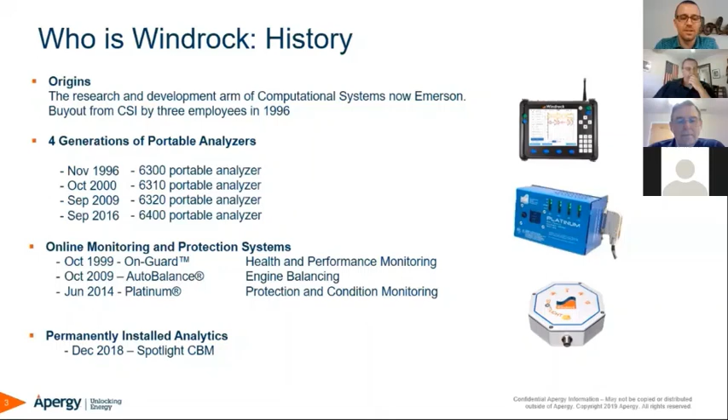And then our newest product is Spotlight. We've got Spotlight for both compressors and high-speed engines. We'll deep dive into each of these momentarily.

Starting with Platinum - it's really our Cadillac system. It's collecting data almost every second. It's got real-time data being displayed, and it also works with the AutoBalance for those integral engines.

Moving down, we've got Spotlight. It's an IIoT-enabled system - really kind of a plug and play, easy to install system. We can go out on a compressor, on a 4-throw compressor, and have it up and running in a few hours. It's a low cost system, and you can see all your data remotely. We have a dashboard called Windrock Enterprise, where you can see not only your entire fleet, but drill down into just one single machine. And then we have our 6400 portable analyzer, which you can use to go out and collect data on multiple machines.

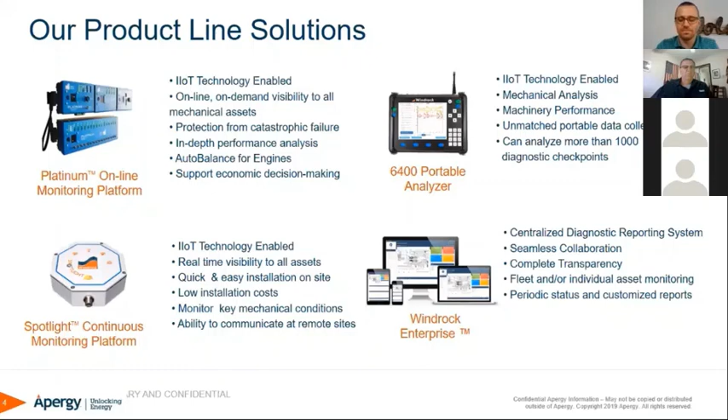Our products are used across various assets. For the critical assets - those machines that really require real-time monitoring and protection, where you want to shut down at the sign of a catastrophic failure, or before one - we recommend Platinum. That's probably about 20% of the assets out there. And then for the essential assets, where you want to monitor the system but aren't interested in the protection aspect, that's where Spotlight comes into play. We can monitor an entire fleet and let you know when a problem may be occurring.

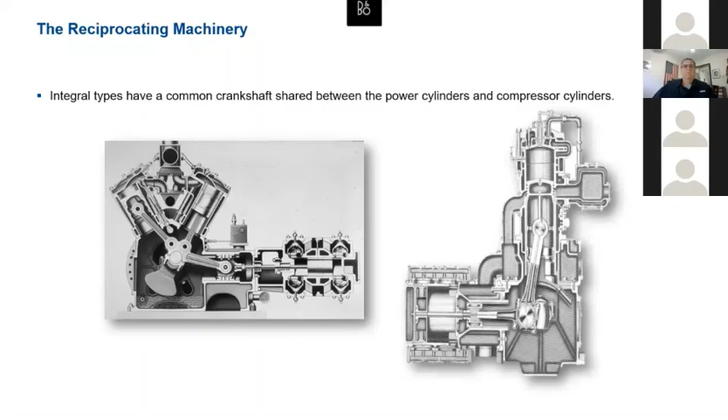PV diagrams - it doesn't make any difference what kind of compressor you've got, whether it's an old slow speed integral or a separable high speed. The PV diagram is the same for everything.

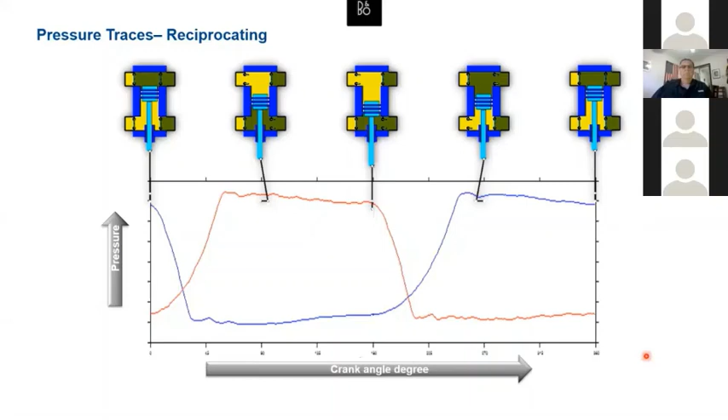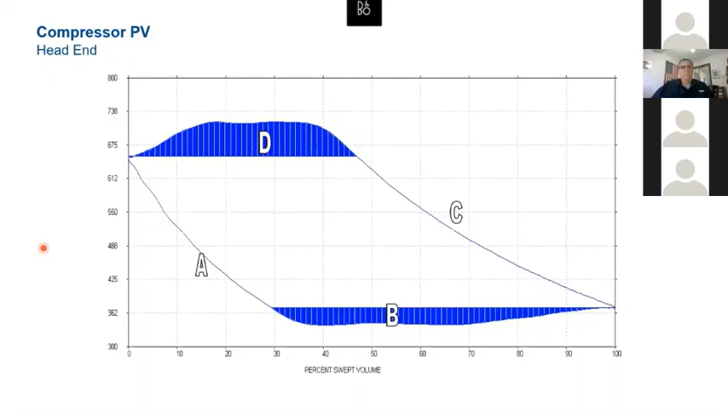Now one of the main calculations we get out of that is the horsepower - your indicated horsepower. All this area inside the PV diagram represents work, including these shaded areas. These shaded areas are actually power losses, but they're included in the horsepower. So all that area in there is work.

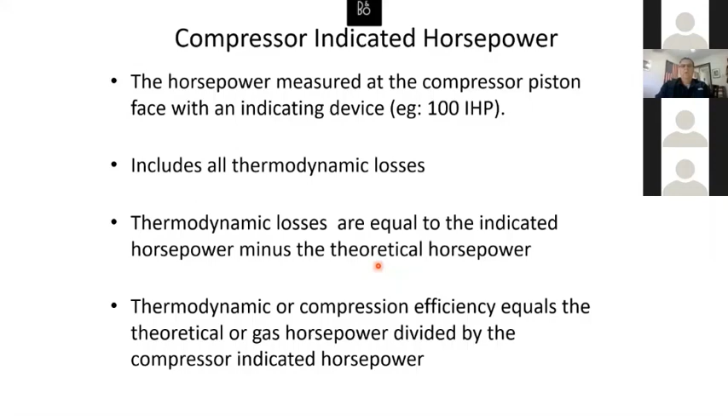And that doesn't mean that poor horse has to pull 33,000 pounds in 1 minute. He could pull 33 pounds 1,000 feet in 1 minute. You know, it all works out the same.

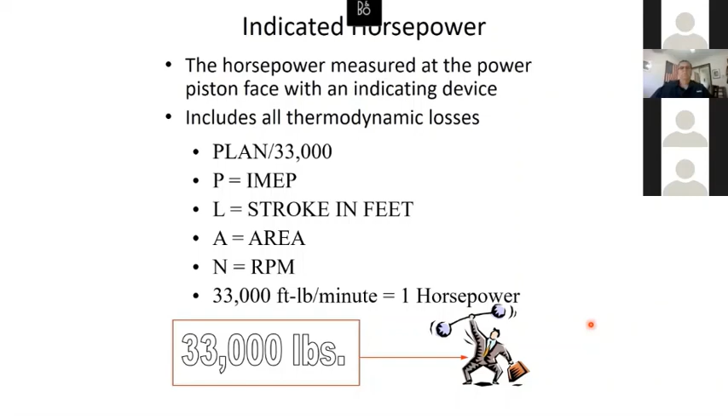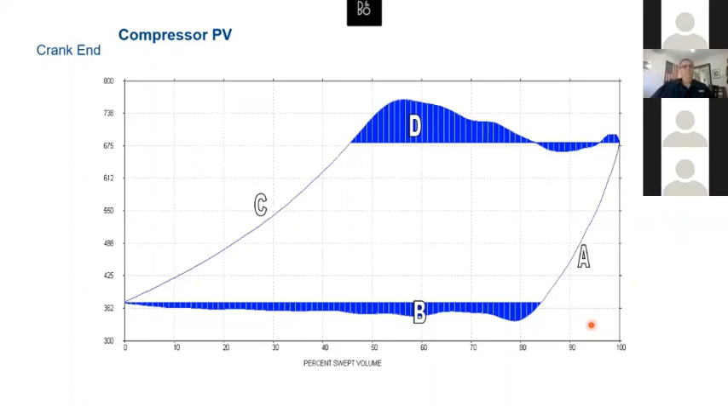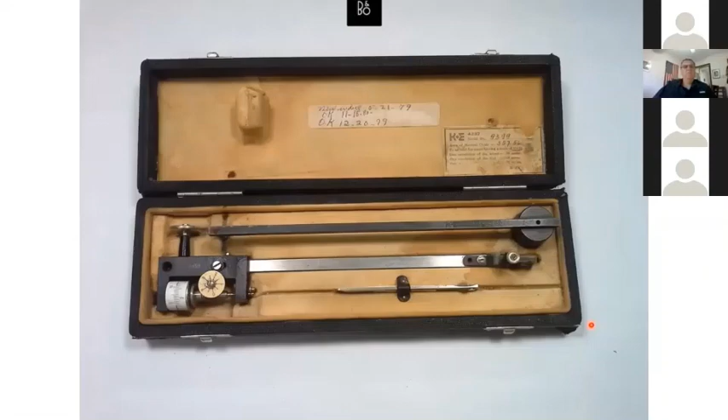In the old days, we'd take that PV curve, which we got by various means, sometimes an old XY plotter hooked up to an analyzer, and we used the polar planimeter. With the planimeter, we actually measured the inside area of the PV curve in square inches and converted that into indicated mean effective pressure. We'd anchor the thing, set the beam for the scale, anchor it down, and trace the PV curve to calculate the indicated mean effective pressure.

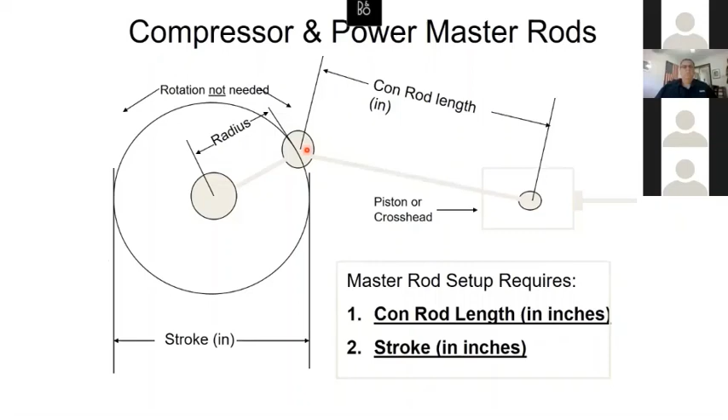Now the way we're doing it nowadays, we have to have certain information to put in there. We need the connecting rod length and the radius of the stroke in order to calculate what the piston position is going to be at every degree of crankshaft rotation.

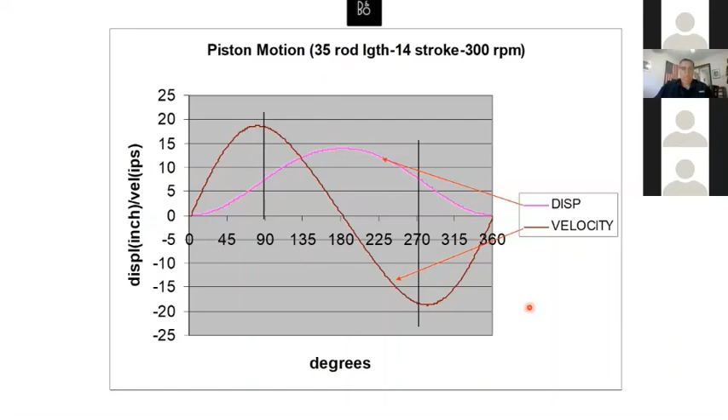This is the speed of the piston. It's not the same for every degree of crankshaft rotation - it's speeding up, slowing down, speeding up, slowing down. At bottom dead center and top dead center, we can see places where it flattens out, where it's not moving much per degree of crankshaft rotation. So the analyzer has to know that so it can calculate how far that piston moved at every degree of crankshaft rotation.

Because what we're actually doing is measuring force, which is pressure times area. The analyzer can do that for us - we know the area of the piston face and the pressure at every degree of crankshaft rotation. But to calculate our horsepower, we have to calculate work, which is force times distance for the stroke, but at every degree of crankshaft rotation.

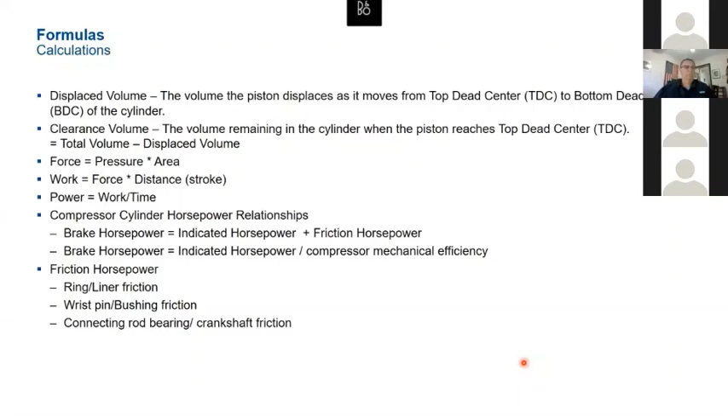So we have to know the distance the piston moved every degree so we can calculate the horsepower. Power is work divided by time, which is the 33,000 foot-pounds of torque per minute. Once we get all that done, it's pretty easy to calculate horsepower. It's just very dependent on your TDC setting - if your TDC is off, you're not going to be able to calculate horsepower correctly.

Now let's talk about the suction volumetric efficiency. The suction volumetric efficiency is the percent of the cylinder's displacement that the piston passes through if you draw an imaginary line from the toe pressure to the expansion line. Discharge volumetric efficiency is the percent of the cylinder's displacement that the piston passes from the discharge toe imaginary line to where it meets the compression line.

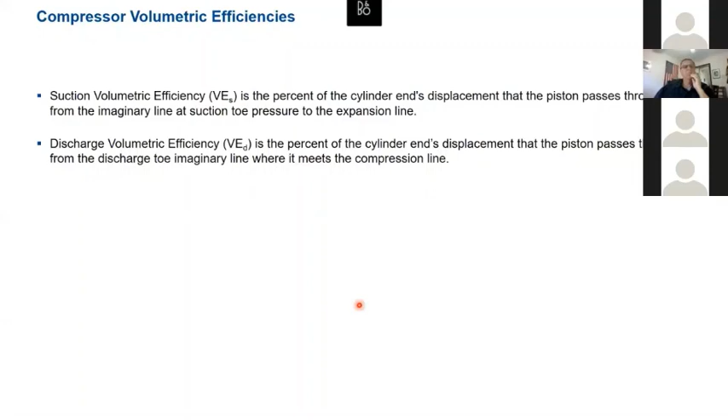So what we do here is go from toe pressure, you see on the discharge, draw that imaginary line right here till we meet the compression, then draw it straight down, and then we can calculate the volumetric efficiency.

This is the actual percentage of the swept volume that we use to move gas in this cylinder based on your clearances. Same thing on the suction here - we calculate the volumetric efficiency from the suction by going from the suction toe, drawing our imaginary line all the way till we reach the expansion line, and then measuring that down here on our percent of swept volume.

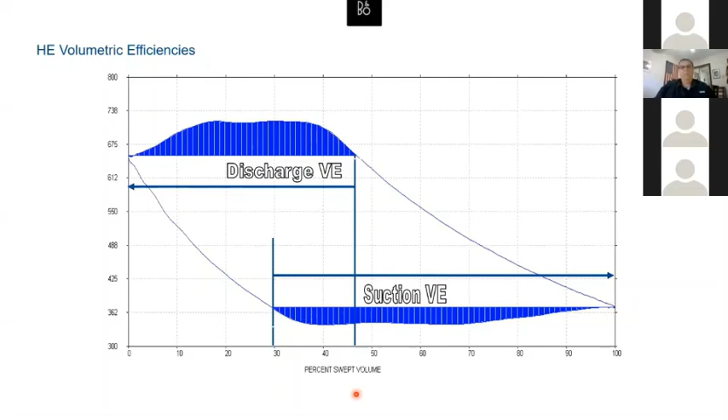We used to have to do that with a Polaroid photograph and a ruler to figure all this out, and the oscilloscope screen had graticules on it to help us calculate the volumetric efficiency. We're lucky now that we can do all that with the computer - we just poke the button and we get horsepower.

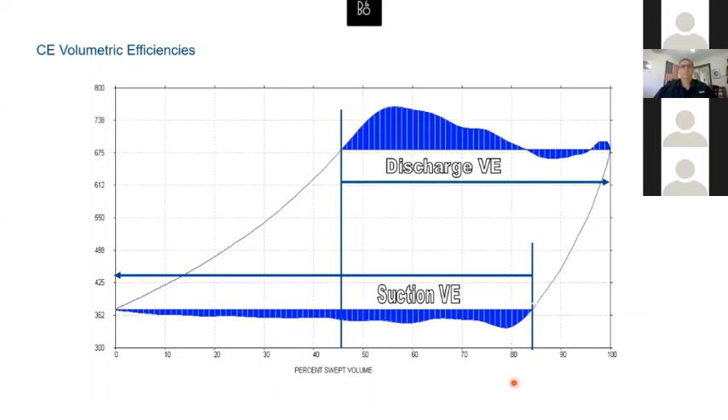Same thing when we're looking at the crank end here. We draw the imaginary line from the toe on the suction to the expansion line, measure the volumetric efficiency at that point, and then take the discharge volumetric efficiency from the toe to the compression line and do the same thing. We do that because we need the volumetric efficiency in order to calculate the throughput, or capacity of the compressor, based on the volumetric efficiency.

Actually, it's based on the displaced volume times the volumetric efficiency times RPM times 1440, which is the number of minutes in a day. Then we go through a pressure correction and a temperature correction divided by the compressibility factor. The pressure correction and temperature correction are in order to turn it into standard cubic feet a day - this corrects whatever readings you took back to sea level at 60 degrees Fahrenheit.

So that gives you the 14.696, or whatever that's your sea level pressure, and then it's 60 degrees, and it's going to correct everything back to that so we can have standard cubic feet. But from the PV, the main thing we get from that is the volumetric efficiency.

There again, your top dead center, and a lot of different things go into calculating your capacity. Other things you may have to look at are your temperatures, your gas sample, and several other factors that go in there. The linearity of your pressure transducer, several different things in there.

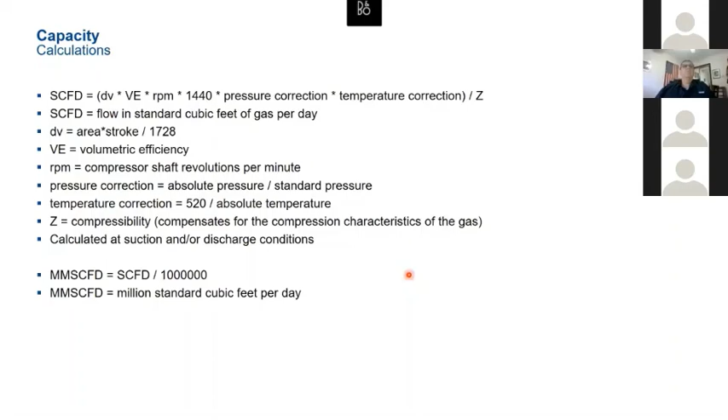So one thing to remember when we're using your calculated capacity is suction calculated capacity goes up with a suction valve or packing leak, or anytime you've got high pressure gas leaving the cylinder. The suction calculated capacity goes down with a discharge valve leak, or we have high pressure gas coming back into the cylinder. Discharge calculated capacity goes up with a discharge valve leak. Discharge calculated capacity goes down with a suction valve leak or a ring leak. Just the opposite.

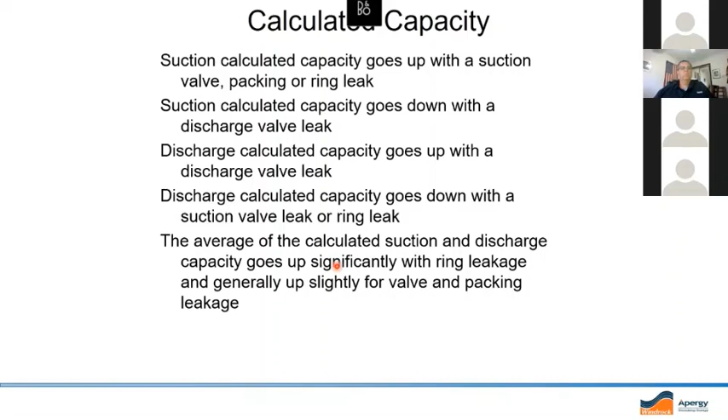Now what we're talking about here, the calculated capacities go up or down. The actual capacity is going to go down no matter what kind of leak you have. The average of the calculated suction discharge capacity goes up significantly with ring leakage, and generally up slightly for valve and packing leakage. But your actual always goes down on that.

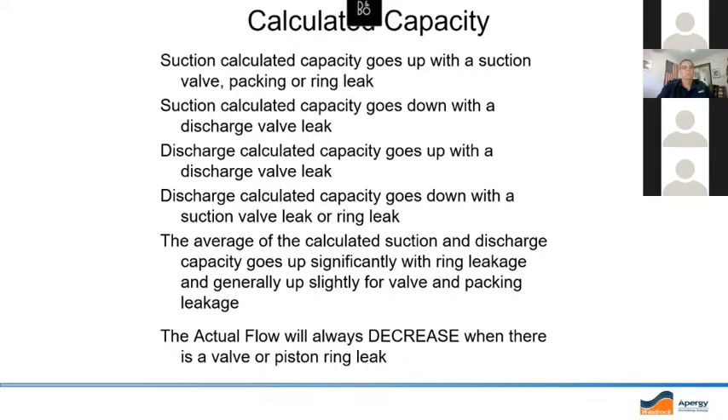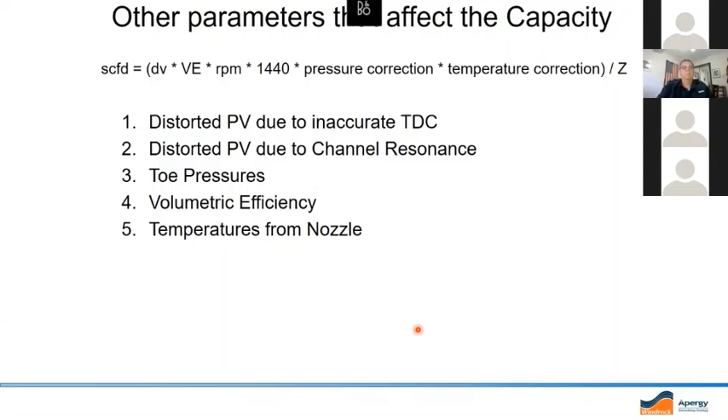Here's things that's going to affect your capacity calculations. Distorted PV due to an inaccurate top dead center, distorted PV due to channel resonance, toe pressures, volumetric efficiency, temperatures from the nozzle, gas properties, pressure zero offset, or pressure transducer linearity. These are just 8 of the things that may affect your capacity readings.

Now your flow balance is also calculated from those capacity readings that we use the PV for to obtain the volumetric efficiencies. So the flow balance is just telling you the difference between your calculated suction flow rate and your calculated discharge flow rate.

We get a result greater than 1, indicates that the gas is leaking out of the cylinder into a low pressure area. And a result less than 1 indicates gas leaking into the cylinder from a high pressure area. If you think about it, that's really the only leakages that you've got. You've got gas coming in, or you got gas going out. Those are the two leakage patterns that you can have.

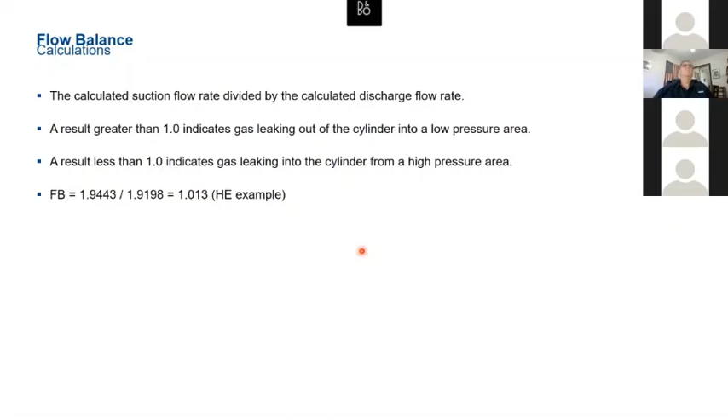Your accurate flow balance is dependent on the accuracy of the TDC reference. There we go again, that's probably the most important thing you want to make sure is correct on your PV card, the TDC reference. The toe pressures, suction and discharge temperatures at the valve ports, gas compressibility, and volumetric efficiency picks.

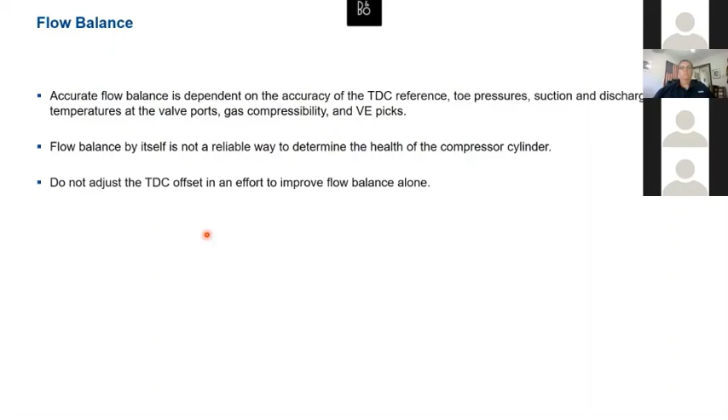And going in, I want to stress that flow balance itself is not a reliable way to determine the health of a compressor cylinder. And you never want to adjust the TDC based on that.

Another thing we're looking at when calculating capacity is the Z factor, the compressibility factor. It's the ratio of the molar volume of gas to the molar volume of ideal gas at the same temperature and pressure. It's a useful thermodynamic property and whatever.

Actually, what the Z factor is, is a fudge factor. It's saying that the gas sample you're compressing has these characteristics that don't really match up with the ideal gas law. So they're saying we're gonna modify that a little bit to make it where it does match up.

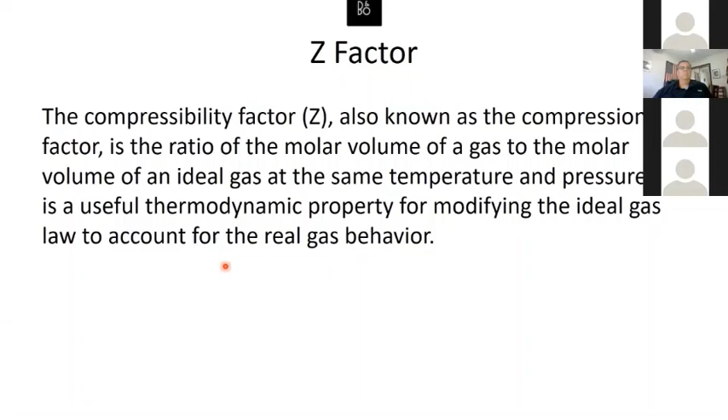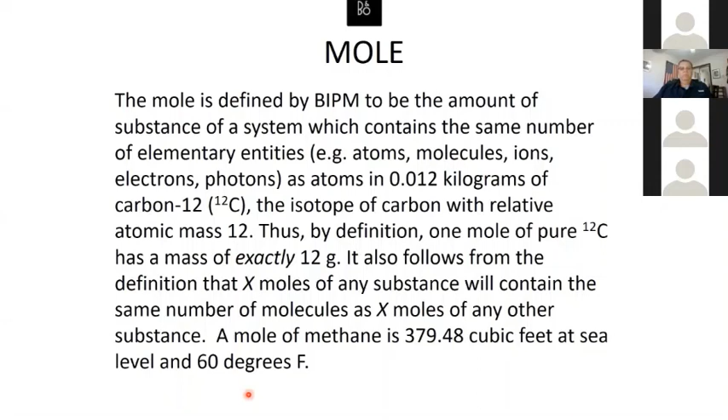And you're talking about molar volume of ideal gas, this is where this comes from. It's just the amount of any substance that has the same number of molecules as 12 grams of carbon 12. So going by that criteria, a mole of methane is 379.48 cubic feet at sea level and 60 degrees Fahrenheit. That'll kind of give you an idea when we're talking about moles, that's what it is.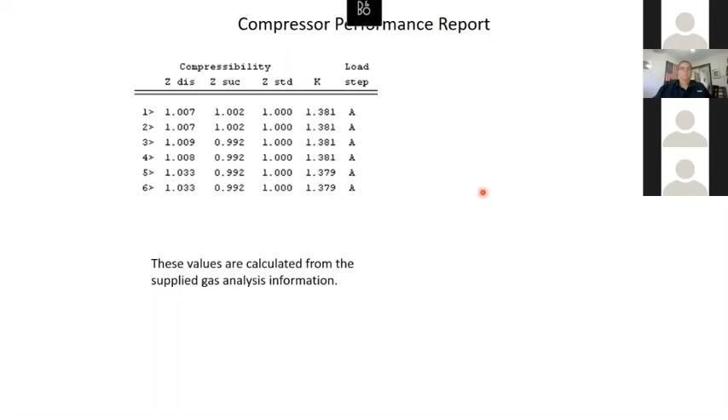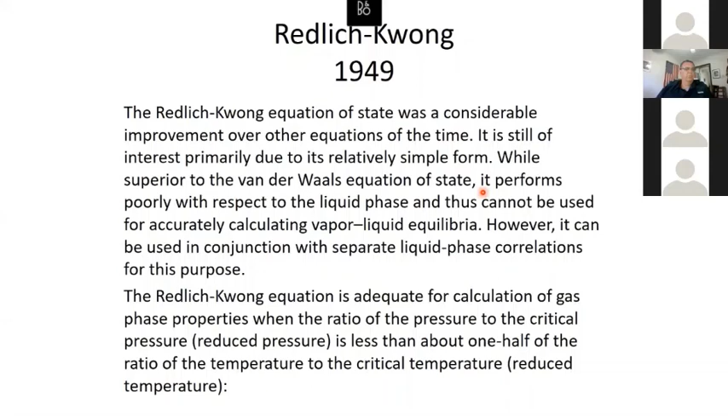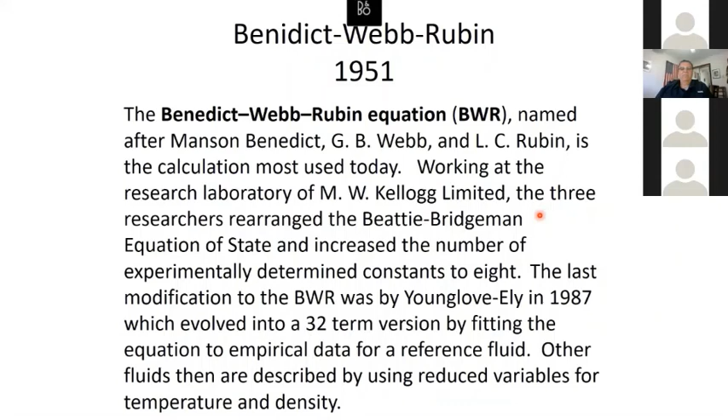We've got a couple of equations of state, which is what we call them, where we calculate the suction and discharge compressibilities, and these are just some of the different ways we do it. We use the Benedict-Webb-Rubin, I think 1987 was the last update on that, that's the one we use. If it won't match up, then it goes all the way back to the Redlich-Kwong, which is a very simple one. So we have three different ones. We'll also use the Beattie-Bridgeman. So we have three different equations of state in there. It uses the most modern one; if it can't do a calculation, it'll keep scooting back to the Redlich-Kwong, which actually anybody can make an equation of state out of.

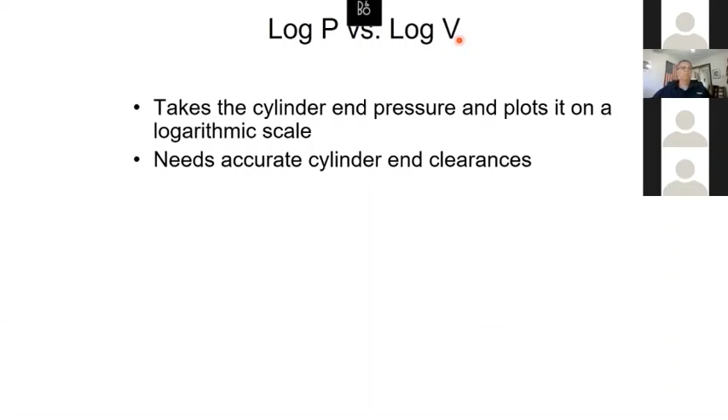Okay, now here's the cylinder end plot. What we do is plot it on a logarithmic scale. This is your log P versus log V, logarithmic pressure versus logarithmic volume. So this is actually a pressure versus volume trace.

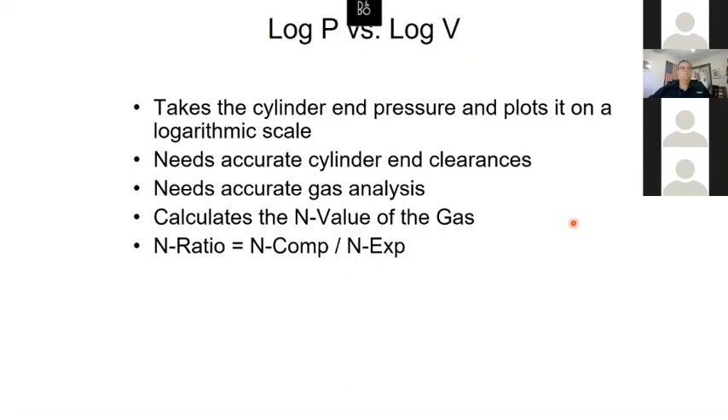For that, we need to take the cylinder end pressure and need accurate cylinder end clearances. That is very important. We have to have an accurate gas analysis. It calculates the N-value of the gas, which is a polytropic calculation, and what it's doing is predicting the compression line and the expansion line in order to line those things up so they can be parallel to each other. If they're parallel, then you're looking at a normal cylinder there.

We use the N-value quite a bit when we have high compression ratio, low throughput cylinders. Your volumetric efficiency picks could be kind of iffy in that type of situation. And we found out that the N-ratio, as long as we have the right clearance volumes in there, works better in that situation.

Here's one. The N-compression and N-expansion values are derived from the actual slopes of the collected indicator card, in log. Now, you'll also notice that when we're in log here, this is the only plot that the analyzer puts out that's actually in PSIA, or absolute pressures.

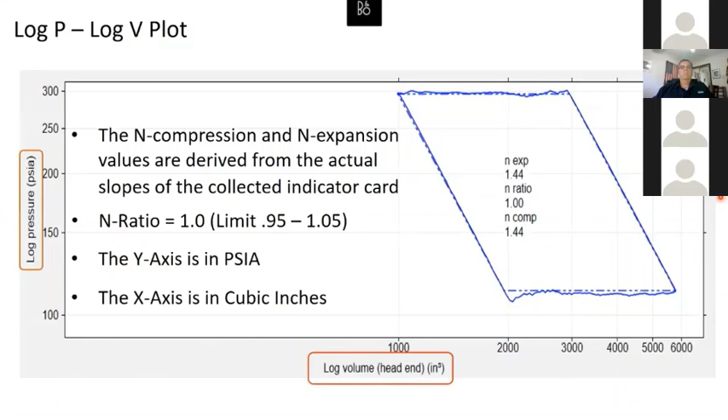Okay, we already did that. So this is where we can pull up the clearances, and we can see the calculated suction and the calculated discharge clearances, and those should be pretty close to each other on a healthy cylinder. And the one we want to use is the average calculated clearances, so that we can draw a really good PV card. If you think about it, if you've got some leakage, the calculated suction and calculated discharge will be different from each other, but the average is average. So it'll still give you a fairly accurate look at your log.

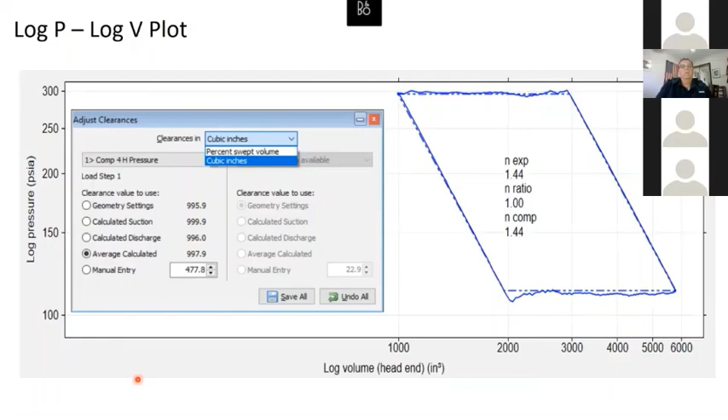Okay, you're calculating your cylinder end clearances. Thank goodness the analyzer does that for us, but we've got two different methods. We've got the GPSA model, or method, which uses the formula out of the GPSA engineering handbook, and that formula is actually modified by the compressibility factor. Some gases that doesn't work real well, so we have a Southwest Research, a modified Southwest Research method, 8410A, which uses their formula, modified by the ratio of specific heats, or the K value.

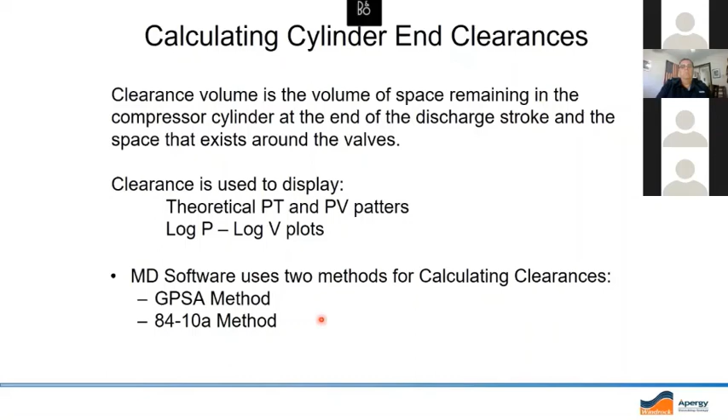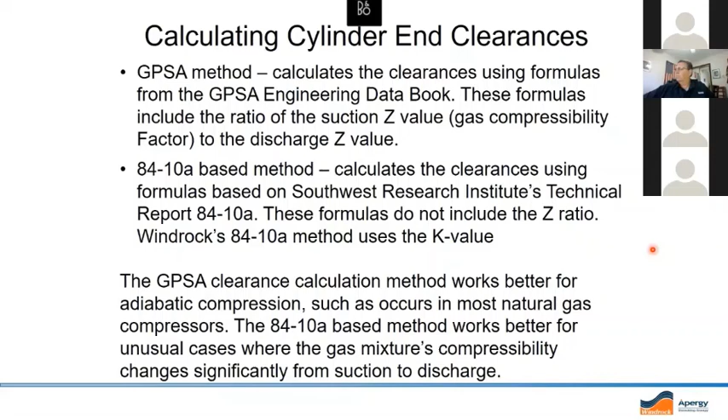So here again, we've got some things going on here: the GPSA works better for adiabatic compression, such as occurs in most natural gas compressors, and the 84-10a method works better for unusual cases where, and this is the kicker, the gas mixture's compressibility changes significantly from suction to discharge. Like when you hit up around supercritical on CO2 or something like that, then the 84-10a will actually work better than the GPSA. It's actually pretty easy to tell; you just switch back and forth between them and use the one that gives you the best calculations. There's no real big rule of thumb there.

And this is kind of what we're looking at here on these N values. After we get the correct clearances and everything in there, and we've got a healthy cylinder, so we've got the polytropic calculation, and these are from the slope of the lines. So we're looking at the expansion and the compression, and those should match up fairly close to what your K value is.

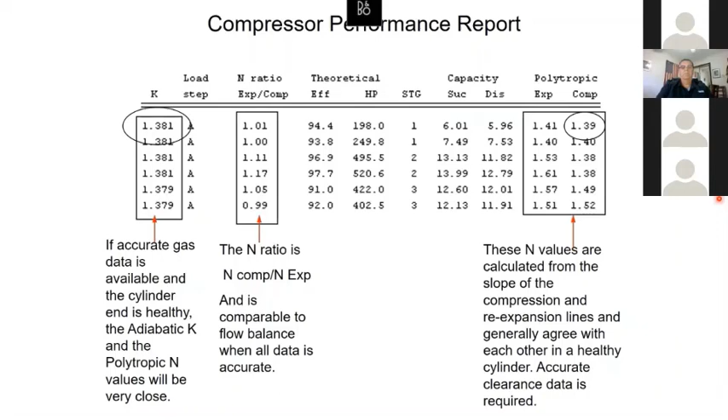Okay, here's a list of things we can tell from the log P versus log V. Leaking rings - the compression and/or expansion events do not follow straight lines, and this is true with just about any kind of leakage you've got going on there. The slope of the compression line decreases, the slope of the expansion line increases, and the N ratio increases.

Leaking suction valves - the N ratio increases. Leaking discharge valves - the N ratio decreases. In a packing leak, it will look just like a suction leakage.

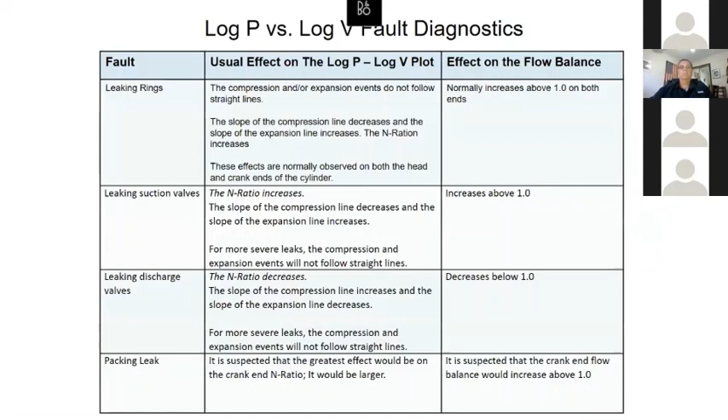Something else we calculate from the pressure versus volume card is losses. Now they call this on reports power valve losses, but it's really not valve loss. It's actually the total power loss in these shaded areas here, from the piston face all the way out to where the gas leaves the yard.

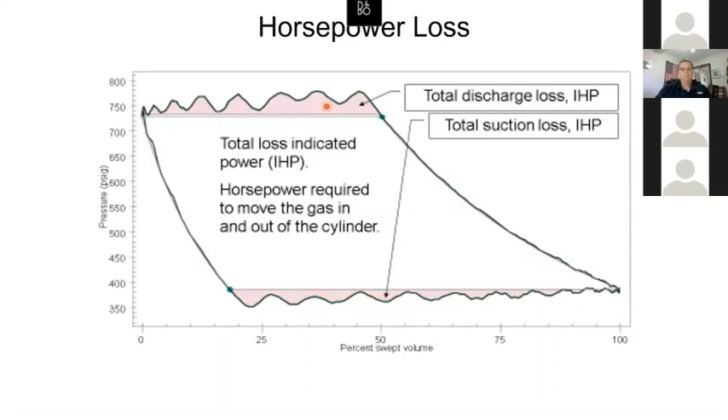So the only way we can tell if that's actually a valve loss is to pull some overlays. This black overlay here is following so close - that's one taken right out of a valve cap. So that's telling us this little area right in here is all the loss we have on those valves. And this second trace we've got is out of the nozzle, and we can see what restriction we've got in there, or how much loss we have between the nozzle and the piston face. So it's telling us our restriction is not in the valve so much as from the nozzle. You go through the flange, the cavity, and the valve. So that would be an accumulation of all of those.

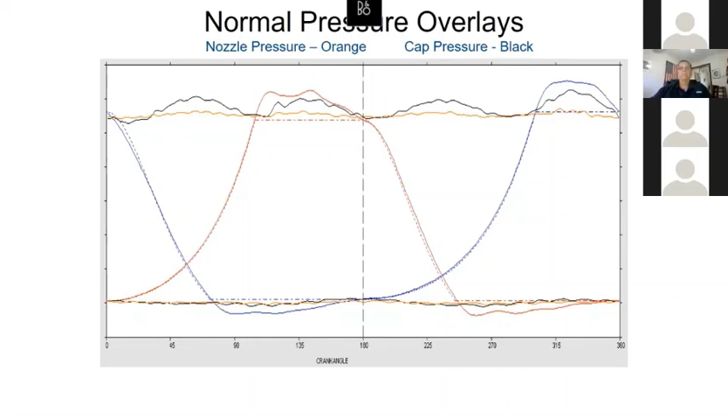I think Brian's taking care of those guys that are raising their hand, aren't you? I am, Mike. You're the man. All right.

Okay, excessive valve loss, passage loss calculated from the PV, 10% rule of thumb. Actually, for valve losses on a slow speed integral, we would like to see, right straight out of the factory, brand new unit, 3% or less. High speed units, the rule of thumb is actually 12%, about 12 to 15, because I see them 17 to 24% all the time, and that's about the best you can get off some of those high speed units.

It's all dependent on the valve lift and flow area, the spring tension, foreign material - PT and PV curves appear rounded during the suction or discharge phase. Verify with nozzle pressure as close as possible to the valve, and that's the kicker right there. In order to tell whether we've got valve loss or restrictions in the line downstream or upstream of the valves, we have to have these nozzle traces in order to figure that out.

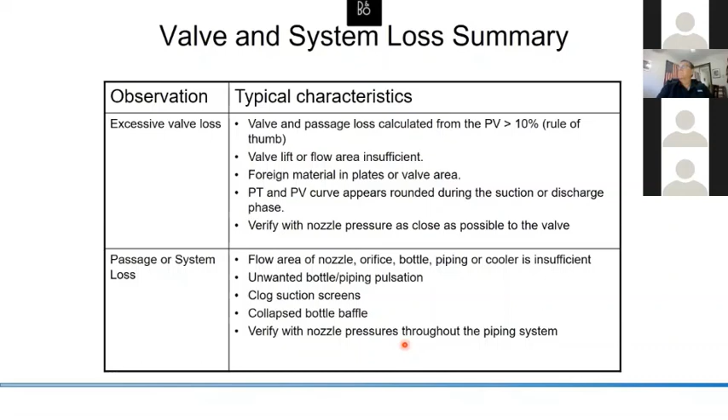Then we've got flow area of nozzle, orifice, bottle, piping, or coolers insufficient - unwanted bottle or pipe pulsation. We've got clogged suction screens, collapsed bottle baffles. Verify with nozzle pressures throughout the piping system. So you may find out that your cooler out there has had too many coils plugged, and that's what's causing your restriction.

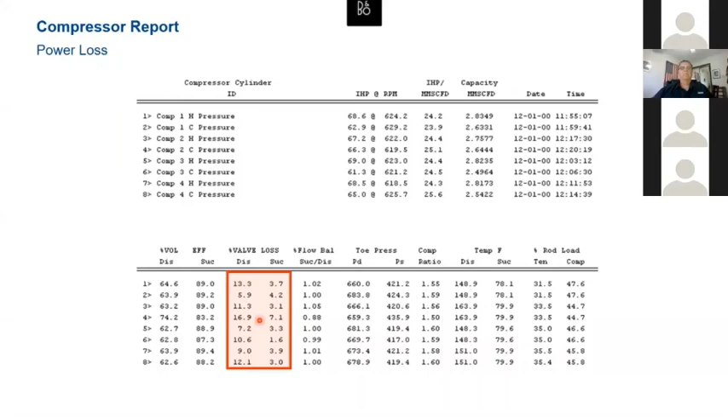Okay, let's look at some of the leakage characteristics of the PV curve, and when we compare those to theoretical, the leaks really show up. So the main thing you can take away from this is a leakage can only occur from a high pressure to a low pressure - it's like water flows downhill. And a valve only leaks when it's closed; an open valve doesn't leak.

Here we've got the various kinds of leakage you can have. We can have high pressure going out of the cylinder, high pressure going into the cylinder, internal leakage where gas is moving back and forth across the piston rings, or some external leak going across the packing or out of a flange or something like that. So those are the types of leakage we can have.

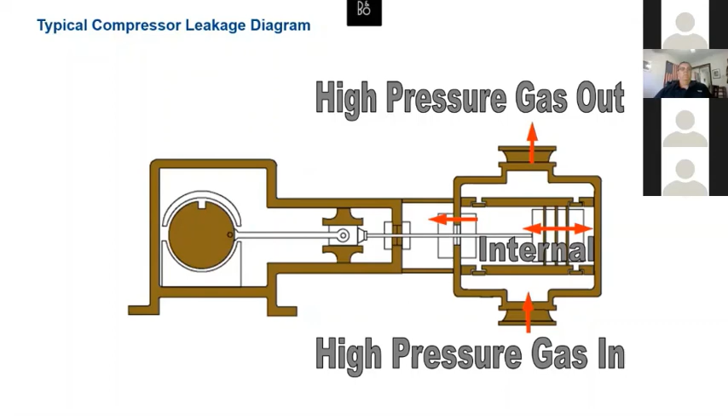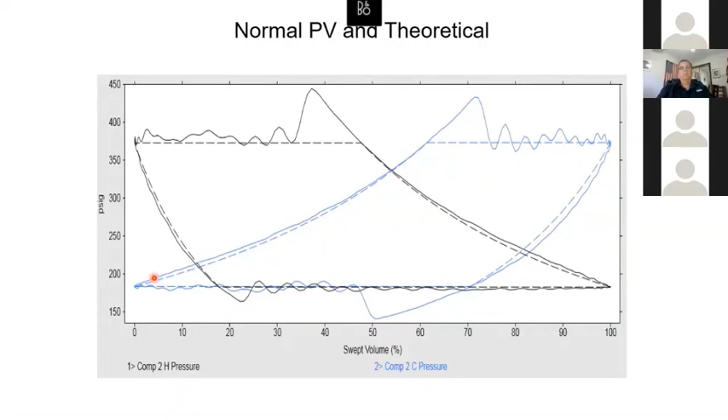This one's a bit unsmooth, but you can see where our theoreticals clamp down pretty close to the toe, to the area in the toe pressure. We've got a little bulging going on in there, but that's really insignificant on this type of cylinder, as long as everything matches up.

Now if we pull up a pressure versus volume trace against the theoretical, we can really see suction leakage going on here, because we have a greater volumetric efficiency. Remember, our throughput is calculated from the volumetric efficiency. So when we overcalculate volumetric efficiency, that means we're recycling gas in the suction and starving the discharge. That's a suction leakage—whichever side has the greater VE over what the theoretical would be. And again, these theoreticals are very dependent on your gas samples and your clearance volumes, so we want to make sure those are all correct.

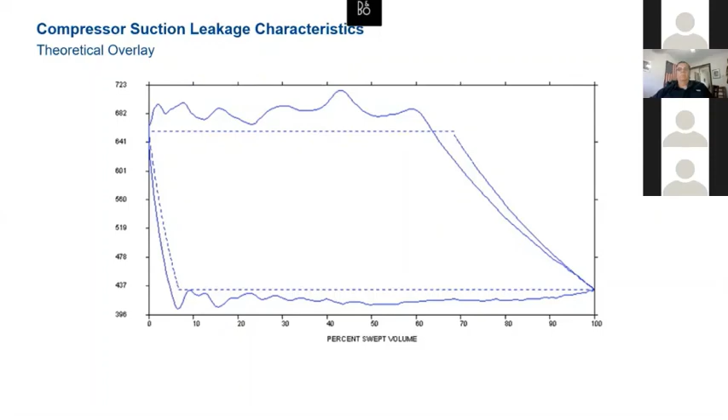And this is a very useful tool—one of the most useful tools you have in your kit.

Okay, and this one here, we can see discharge leakage. The volumetric efficiency of the discharge is way more than what the theoretical says it should be. That means we're recirculating gas in the discharge system and starving the suction. So we can see we have a fairly good discharge leakage going on there.

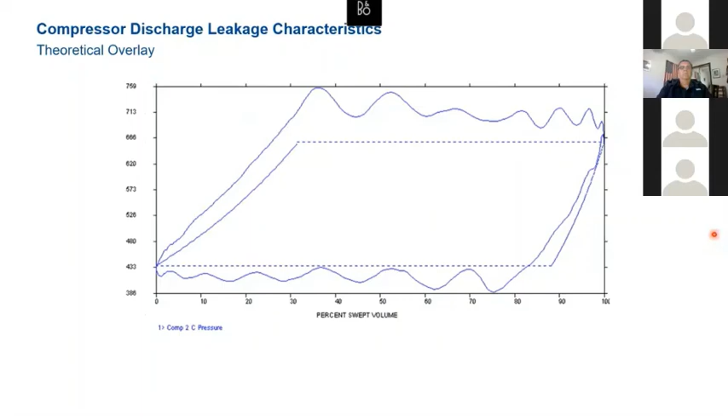Then the good old ring leakage, which everybody has a hard time finding. But against the theoretical, if you can pull that up, it's really easy to tell because we've got this big bulbous nose on the toe, and you can see where it deviates away from the theoretical until we hit pressure reversal. When the pressure reversal happens—the pressure starts getting higher on the other side of the piston—we have gas leaking the other direction. Then it starts moving its way back to the theoretical, and almost gets there before we reach discharge conditions. On the head end, we can see the same thing happening, and it actually crosses over before it gets to discharge conditions. So this is your classic ring leakage pattern. You can even see it without the theoretical, but when you throw that theoretical on there, it really makes a big difference in diagnosing it.

And that's about all I got, guys. How long did we go? What do you think, Brian? 37 minutes—I'm still answering some questions here.

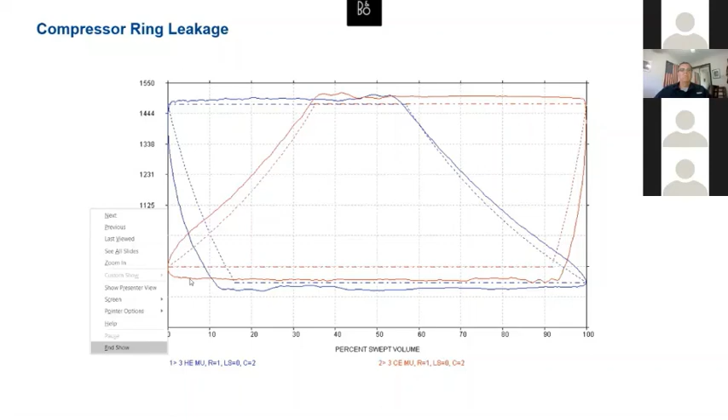Could you pull up a PV card here and kind of explain leak index? Let me see if I can get out of this here. Okay, what we got here? Yeah, we'll just pull this up right here.

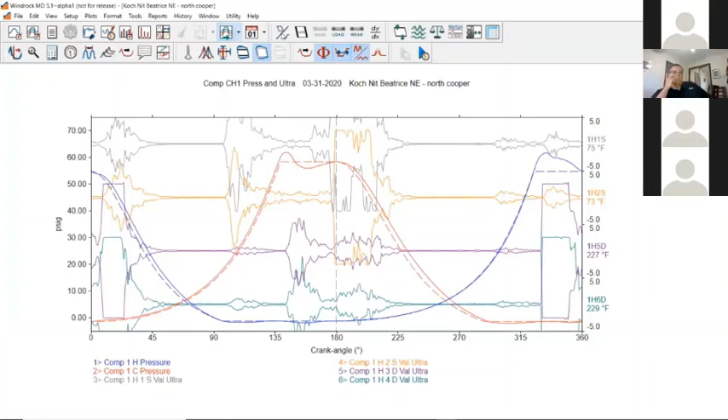So what the leak index is actually doing, it's comparing a designated percentage lower than the discharge toe point, and a set parameter higher than the suction toe pressure, so that your toe pressures and volumetric efficiencies don't play into it.

So what the leak index does, it does about a dozen calculations back and forth across that PV, and during those we're talking about capacity calculations. So during those dozen calculations or so, if it sees high pressure gas leaving the cylinder, then we can call that a suction leak.

If it sees high pressure gas entering the cylinder during those calculations, then we can call it a discharge leak. Then if we see high pressure gas leaving the cylinder for a portion of the stroke and then re-entering, then we can call it a ring leak. So it can be very good.

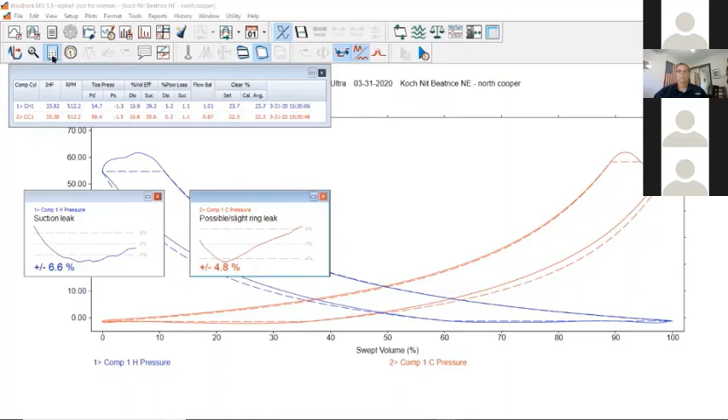The thing about it is, though, it needs to be tweaked for the type of cylinder you're running. Like here, if we've got a high compression ratio and a low throughput, then we can go to our setup in here and the software options, and we can go to leak index here.

We can actually tweak those as far as sensitivity, higher or lower, because the high skinny PVs are going to be a lot more sensitive to leakages, and the low squatty ones, the low differential high throughput cylinders, are very insensitive to leakages. So you need to increase the sensitivity on the low ratios and decrease the sensitivity on the high ones.

You got anything to add to that, Brian? Oh, that's good.

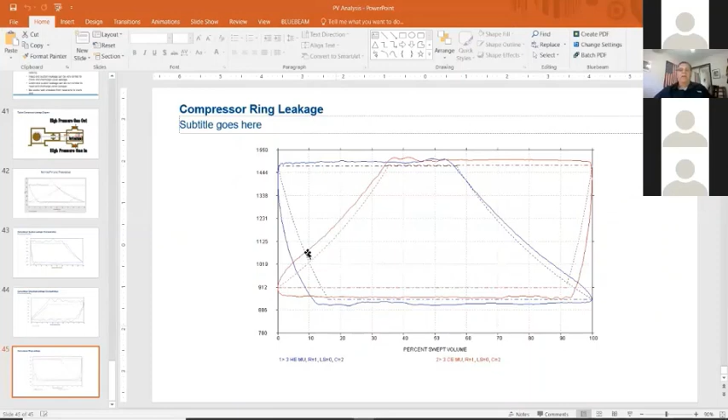Can we tell leakage based on the suction VEs and the suction and discharge toe pressures? I'm not sure I understand what we're talking about there. I guess he's wanting to look at the VEs and the suction and discharge toe pressures to try to tell leakage, which is fine. You can do that in a way, but we have better tools than that.

We have flow balance, leak index, and of course N-ratio, where we can tell valve leakage. The computer will look at these toe pressures and VEs, and then it'll calculate leakage by the flow balance, the N-ratio, and the leak index for us. So we don't really have to do that.

How about you just have to make sure that the data you're bringing in is correct. That's the key.

So that goes into our next question. Can you show how to verify top dead center with a PV diagram? With a PV diagram? Oh.

If your flow balance is off, and if I know my volume, if I know my clearances are right and my theoretical is going to be right, you can verify it by looking at your PV against your theoretical. You can actually move your top dead center, as long as you're in a healthy cylinder, to match your theoreticals and get real close to your TDC.

Then we have other ways of doing it besides that. That might be a whole other class. Do you want to pull up your MD software again and pull up your clearance and flow balance chart and kind of move it? Yeah, let everybody see how we do that.

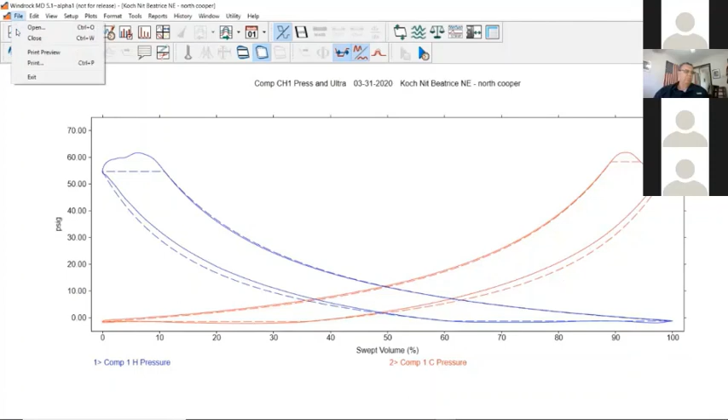Let me find a different thing here. Okay, we got, let me find one here.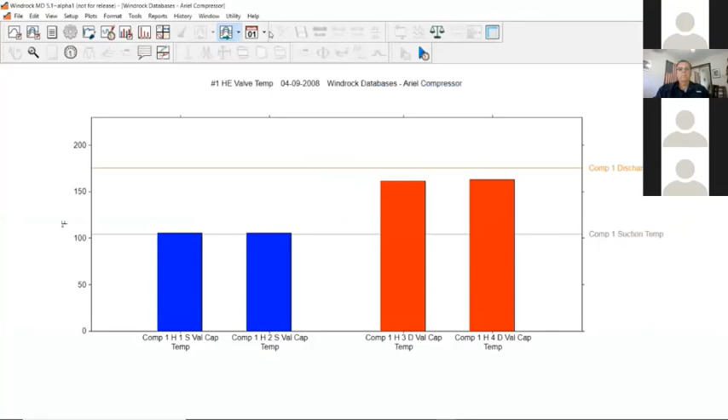So let's look at this right here. Okay, this is a very healthy cylinder. So this is what you'd want to start with if you're going to be manipulating your top dead center.

So what we want to do now is look at our leak index, and mainly we want to see the flow balance and see the clearance calculations there. Next thing we want to look at is pull up our clearances. I'll put it down here because this gets kind of busy before we get done. And then we want to go into the modify, remove line.

Now if you look at these calculated suction, calculated discharge on our clearances, this is in a healthy cylinder. When we get the right top dead center, these will be very close to each other.

Okay, we can go right down here to modify the offset. Let's move it, say 3 degrees forward, which would be to the right. Get the update, and you can see our flow balances went out on us.

If we had the full report up, you can see your horsepower percentage of your rated load would be moving on you too. But the main thing is here on these high-speed units, the calculated suction and calculated discharge, they're getting further away from each other. See, when I do that.

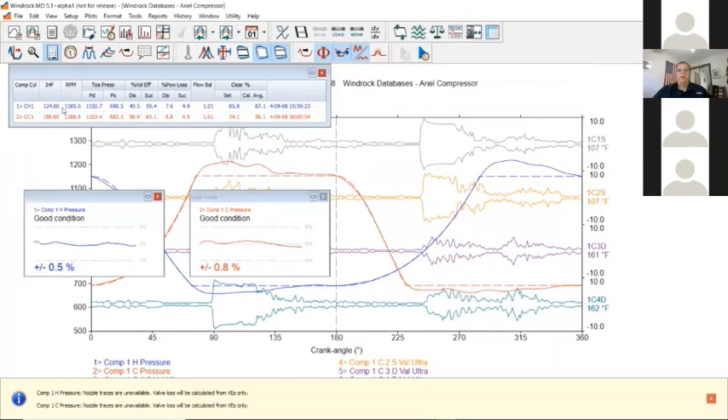Staying on this subject, do you have any advice on adjusting the VE toe pressures, or what drives the decision to adjust them?

So we do have the capability of adjusting the toe and the VE on a PV card. If you go to the PV card, you can see and adjust these.

Well, we get some every once in a while, and I'd have to dig for it, but I've got some in there. We're looking at okay, where our toe picks are. Okay, you see this where that's lining up, where that was lining up, those little dots. Those are perfect, that's exactly where they're supposed to be.

Sometimes we get a really wild spike up here on this end. It's going to pick the toe up here, and we can visually see that volumetric efficiency pick is not going to be good. So you can actually grab that and move it down to where it should be, or use the little spinner boxes up there to move it.

But if you look at it, and if you've got a high area in here that's causing it to be off, or sometimes on the suction side down here, we get a loop in the pressure, like right here. It will extend higher than that, and it will actually pick that as the expansion line. So that blue dot that we're seeing there will actually show up right here in this area, and your calculations will be off and everything will look nutty.

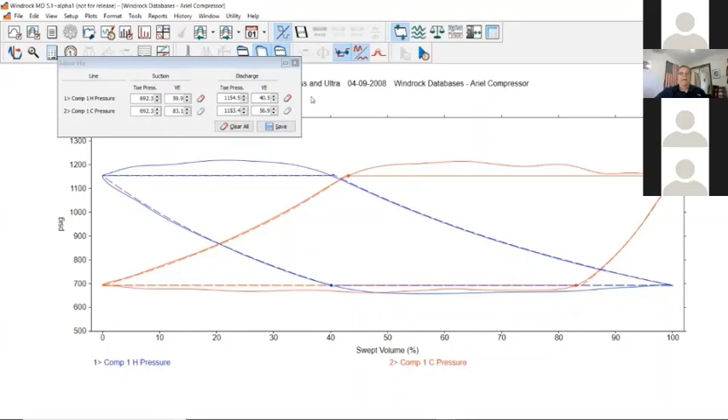Does that make sense? Yeah, and I guess that kind of answers the other question that was asked: can you discuss the loop over seen at the toe on some traces?

Yeah, it's a pulsation going on in there. If you can't smooth it out, then you're just going to have to move the toe pressure to take care of it.

Another question is, how can I see some of those get a big loop? Here, let me turn that off. See, now this one here would have - if I didn't have it smooth enough, I'd have a loop here, a loop down here, one way up here. So make sure you put enough smoothing passes in there to take care of it.

Maybe you could show how we use the smoothing function here. If you turn it back on and go up and down until we get the yellow. Yeah, there's actually several different ways of doing it, but we can go into that. Like this one here, I got it at 14. That's probably a bit much, but okay, we'll enable the smoothing.

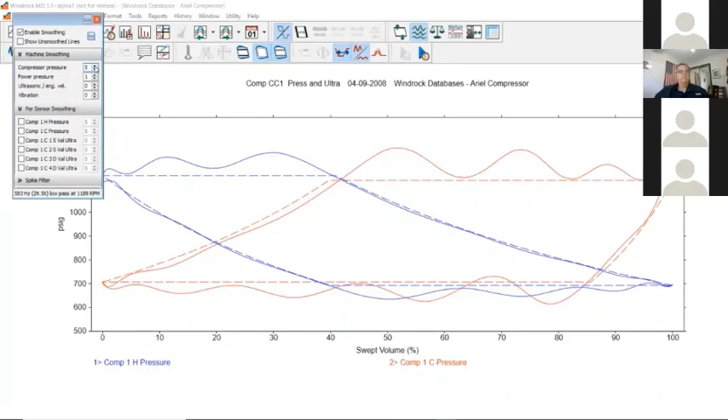Yeah, this is pretty high speed, so we can click this to increase the smoothing passes on it. Like Brian said, you hit the yellow, and then you back off one. That's the way most people do it, and that's still very good. That's a good one there.

Most Ariel compressors, because of the dynamics of the tube, the valves, kidney valves, and everything else on it, about 12 passes is what you need for 1200 RPM. At 1000 RPM or so, you may only use 10 passes, because a lot of that's dependent on the RPM too.

Yeah, basically, I think we're trying to smooth it to where we get our toe pressure to match our actual gauge pressure or bottle pressure, pretty close. We just want to make sure that we don't have any interference on that pick.

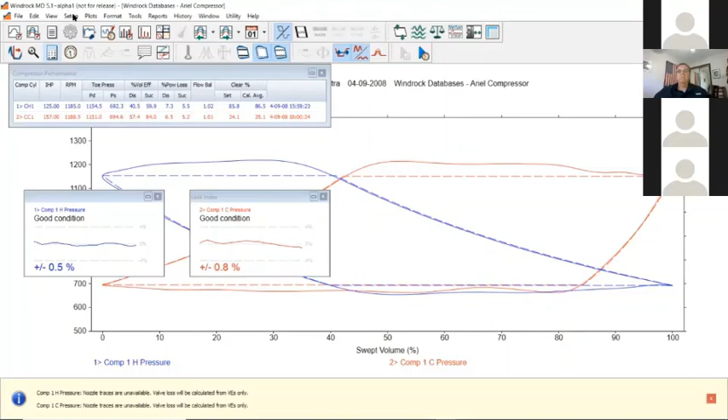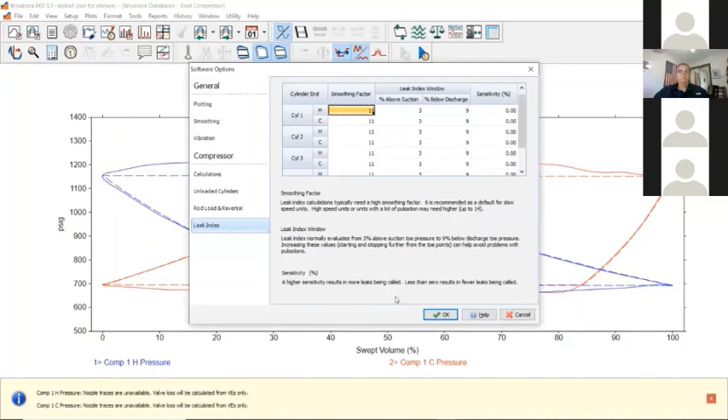So how about the leak index? Do we add smoothing to the leak index? Yeah, we can. We can actually add a different one to that than you use for your normal smoothing. We can go up to the software options, our leak index, and right here we can - well, where is it? Did we lose that feature in our new software? Okie dokie. Yeah, I think it's now using whatever you put in there.

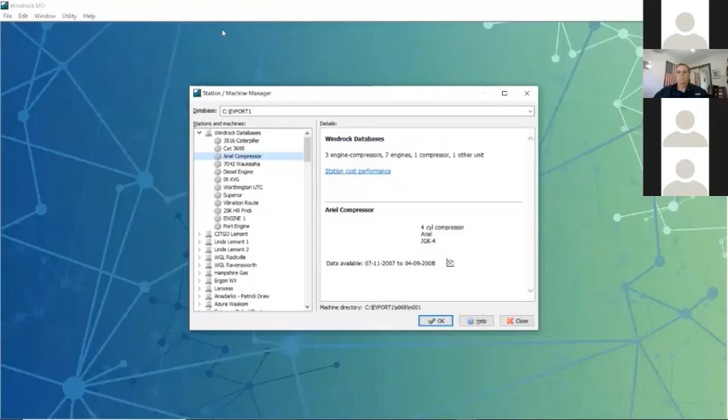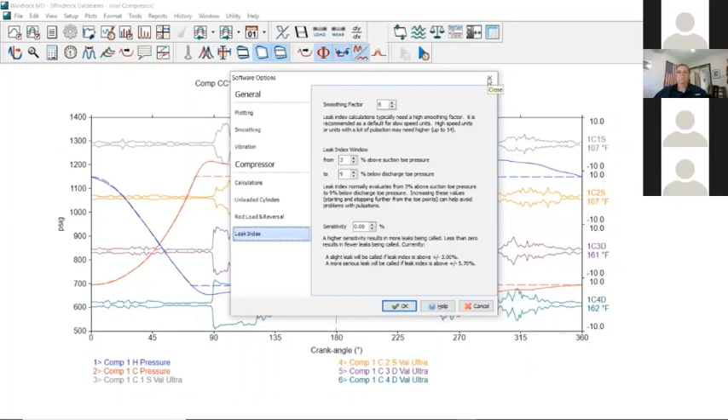So it was 11. Yeah, so it's using 11 there. This is brand new beta software, so we'll pull up the other one. Okay, now we'll go to set up, software options, leak index, and then here we could put in a smoothing factor separate from the one we're using. This is the current version of the software, so we'll have to find out from the software people what we're using now with the newer beta model we have. I'm sure it's probably using the general one we put in for regular smoothing instead of having a separate one for it. Okay, yeah, no, that smoothing is real important for rod load and leak index.

Okay, I think we have time for maybe 1 or 2 more questions. I see it's 10:57 right now. Okay, I got a question.

Somebody's wanting to know if the pressure curve changes dependent on the type of valve, plate or poppet. Oh yeah, the pressure will change because some of them you'll have a lot higher differential pressure to get the valve open, and some of them will have more losses, some less. It just depends on where you go with your valve. You've got some really highly efficient valves out there, and some that are not so efficient but they last a long time. It just depends on what you're concerned with - efficiency or being able to stay home on the weekend. But yeah, your valves will make a big difference.